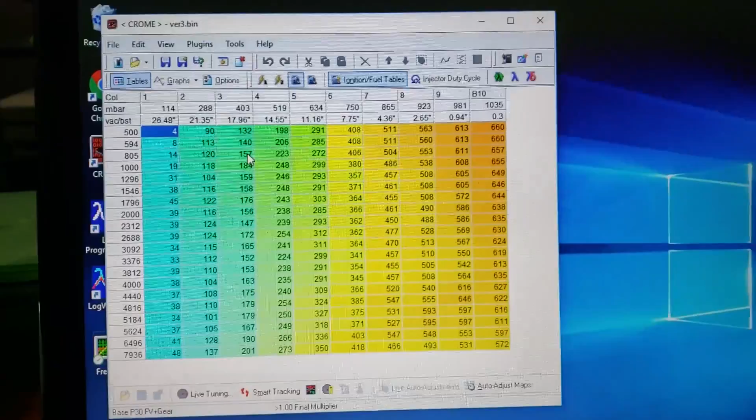What we want to do is add fuel tools, so we're going to go ahead and do that. Now we can click up here and go into multiplier calculator. What fuel tools does is put this advanced tab here.

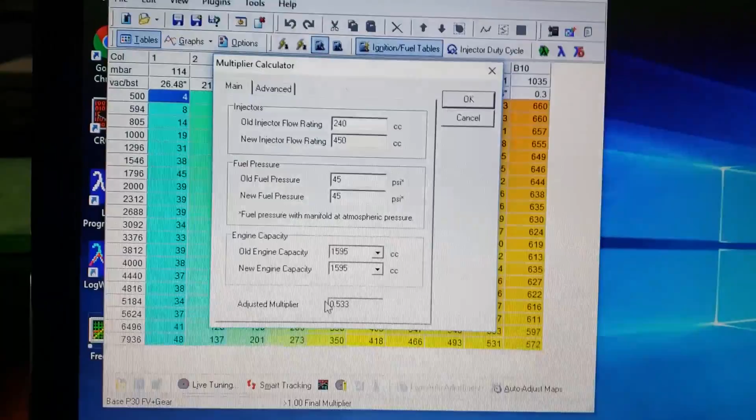So in the main tab, now what we want to do is put your new injector size right there. I'm going to put 450cc, since I'm running DSM blacktop injectors, and you can see it adjusts the multiplier down there. Now we're going to hit OK.

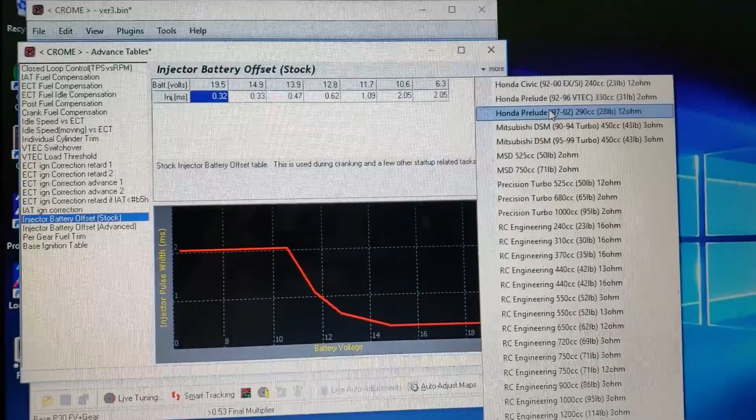The next thing we want to do is go into the advanced tables and down to the battery offset, and there's going to be some presets here. If your injectors are in here, you're going to want to pick them from this preset. So I'm going to go ahead and pick my DSM injectors right there. You can see the curve changes.

Now what we want to do to get the car to idle at the air-fuel ratio we want -- my tune was idling at 16 AFR, so that's what I want it to idle at -- I'm going to burn this and run it in the car and see where it's at.

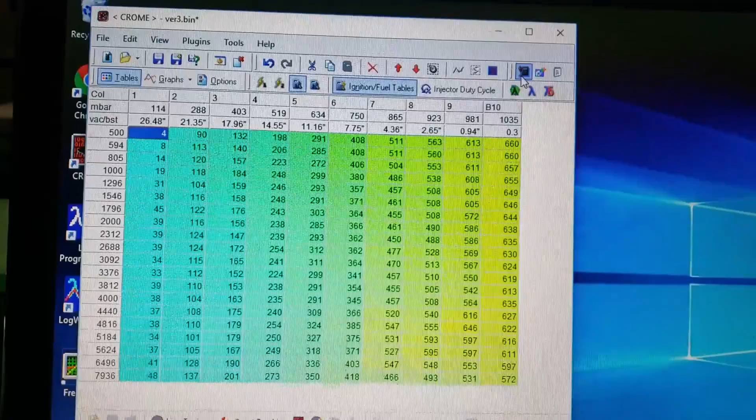Then we want to go into advance here and change this offset. By 10 at a time, if you add to it, it's going to add fuel. Technically, if it's running too rich, we might have to mess with this multiplier a little bit. But if it's running too lean, then we want to add to here. So we're going to get it to idle perfectly.

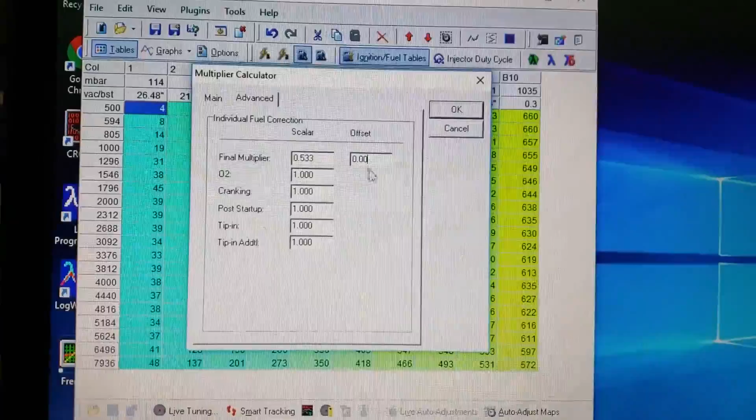And then you can mess with this other stuff. You're going to want to look it up in the intermediate Crome guide -- I'll put it in the description. It kind of explains what all of this stuff does. It will help your car.

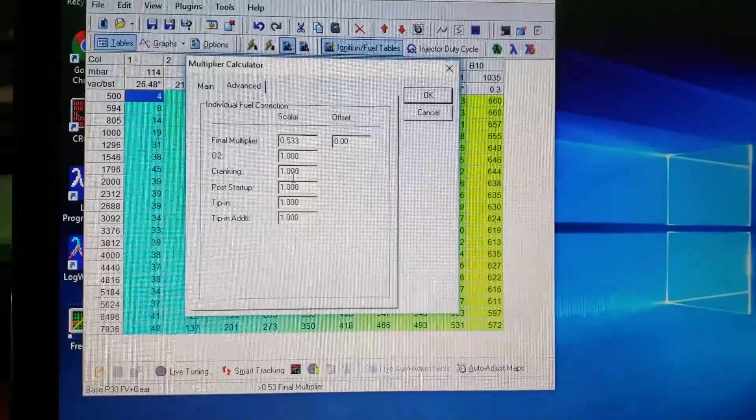If you make adjustments here, you can add fuel, like more fuel when you're cranking, more throttle after the car starts, things like that, to get it to run right, because it's probably not going to start perfect. But you should be able to get it to start and idle, even if it has a hard time, just by messing with these.

So that's what I'm going to do right now. I'm actually going to write this to the chip and go try to start the car and see what happens.

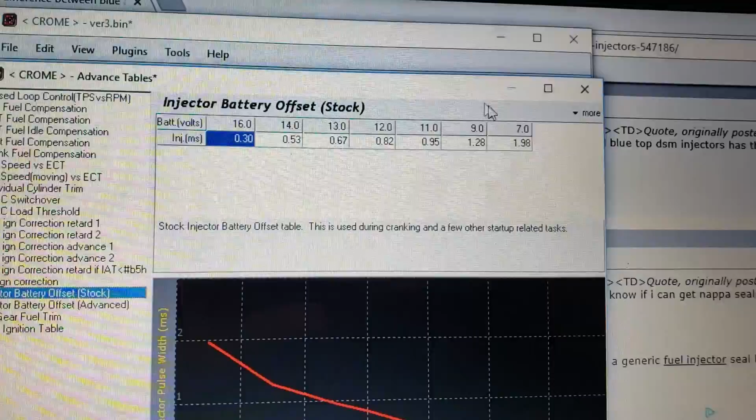So I did make a mistake here, I just want to point it out. I picked the wrong injectors -- I have 2G blue top injectors, so I'm going to switch to that one. And it did change a little bit, so it does matter.

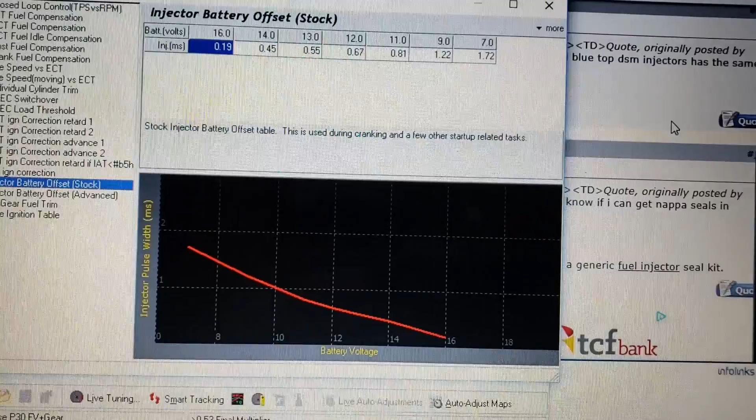Alright, here's the first attempt for starting the car with the new injectors. Nothing.

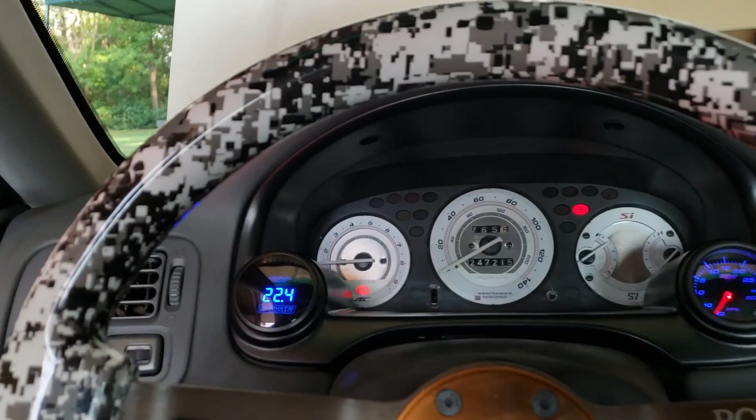Alright, I'm going to try to figure some stuff out. Alright, so one more crank and we got it to start. And it's not running on all the cylinders, so I think something went wrong with my injector install. I don't think it's the tune. So I'm going to figure that out, and then I will get back with you guys.

So, crazy story. It's idling right now, very lean, barely idling, but this is fine. I can adjust the fuel to get this to work. It's firing on all cylinders. Well, I mean, it's misfiring because it's so lean, but it's not misfiring evenly anymore.

It was cylinder number 3. The injector wasn't firing for some reason. Everything seemed to be plugged in and everything, I don't know what the deal was. I unbolted the fuel rail, and I'm going to shut this off because I'm going to have to turn up the offset a whole bunch.

I took out the fuel rail and swapped that injector with cylinder 2 to see if it was a wiring issue, to see if the issue would follow the injector or follow the wiring. When I started it back up, all of them were firing, so I'm thinking maybe it just wasn't plugged in all the way. Well, all of them are firing now, so we can go ahead and continue, but I got to go back to work, and then I will show you after work.

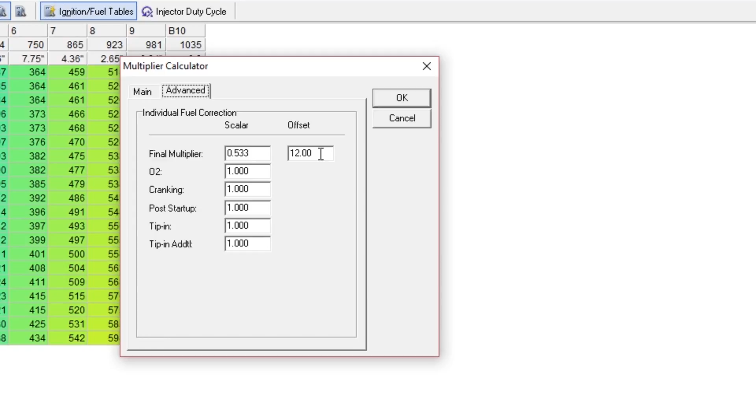Okay, so I want to apologize. It's been a little bit of time since I've actually done the injectors, so I don't remember everything I did to get everything working properly, but I can show you one of the things I did: I ended up with a 12 offset to get that 16 air-fuel ratio I was looking for.

Currently editing this, and I realized I never really mentioned this. I'm doing this on a D16Y7, meaning I don't have VTEC at all, so I disregard all VTEC maps for this entire video. If you're setting up your first tune, you want to set up the low cam maps anyway, so you'll have VTEC disabled and can follow this step by step. Then once you enable VTEC, you should still be able to go through this entire process and apply it.

Certain things will be a little bit different. I think Freelog might map VTEC on the high cam map. I'm not entirely sure, but you can figure it out for yourself. Unfortunately, I don't really have any experience with that because I've only worked with non-VTEC. Just wanted to throw that out there.

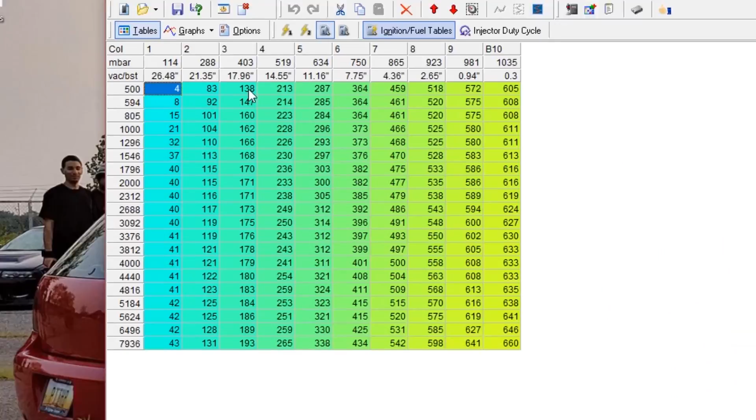Another thing that I did is I went through my map and rearranged it a little bit. I basically made it so, from this corner to this corner, you're constantly increasing, and from here to here, you're also constantly increasing. There's no values where you go from 376 to 392 to 378, you know what I mean, so there's nothing like that in there. You have a way smoother map, which I would recommend doing if you haven't done that already.

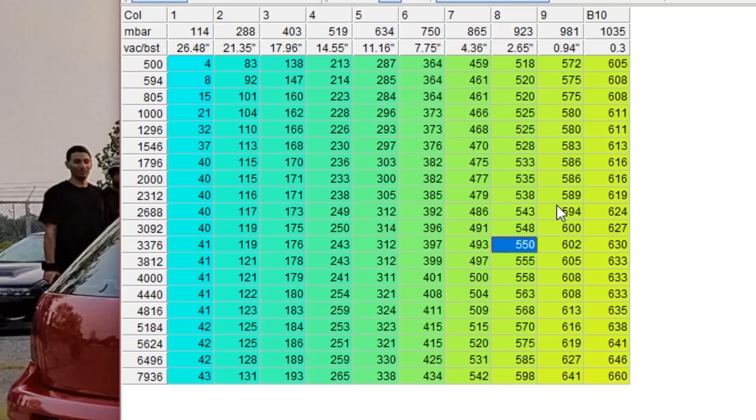And then from there, I'll show you how to go ahead and data log and tune. I'm doing this on my desktop computer, so I haven't been doing any tuning on this computer. I can show you from the start, except I already have my HuLog installed, but I'll show you how to do that. What you're going to want to do is download the drivers for your HuLog.

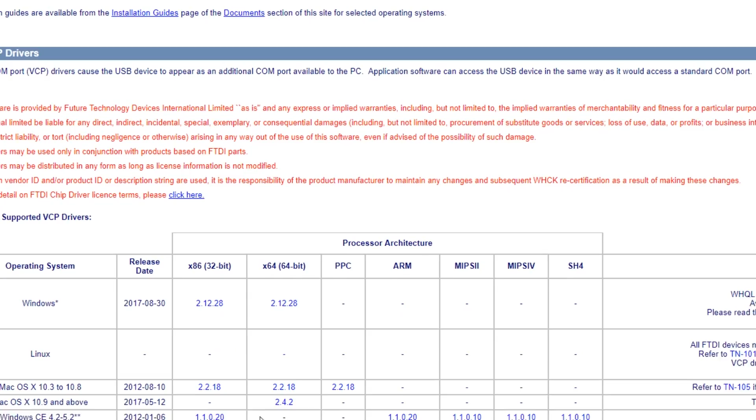So I'm going to download that. Now give me a second, I'm going to copy this to my desktop really quick. So now I have it on my desktop. What we're going to do is just extract this, and I can delete that now. We can take a look in here, and you can see this is what they give you for your drivers, which you might not know what to do with.

So what you actually end up having to do is go into the device manager. We're going to do that by right clicking on PC and going to properties and then device manager. You're going to see your uninstalled device in here, probably listed under COM. One thing you want to keep in mind is this number you see right here, COM6 - it might be different for you, so pay attention to that.

So to install it, you want to right click and go to update driver, browse your computer for the driver, and just browse to this folder and it'll install the driver for you. It's actually pretty simple. The next thing you want to do is right click on this and go to properties, then go into port settings and change the bits per second to 38400. If you don't change it to this and leave it at 9600, it's not going to read fast enough when you're data logging.

I made that mistake before, so make sure that's set up correctly and then you're ready to start data logging. One thing you want to make sure on your tune is that data logging is enabled.

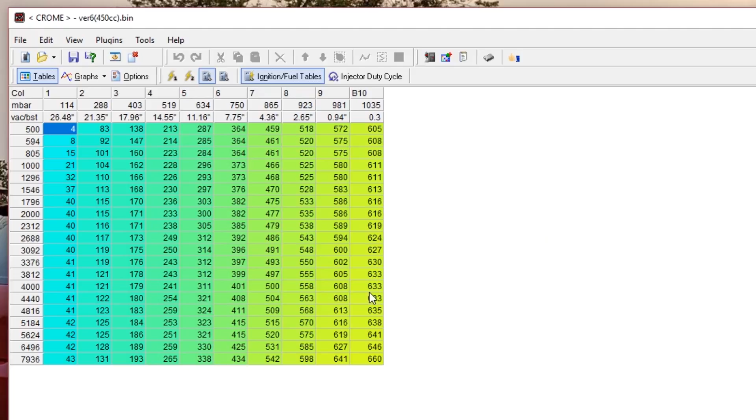On the actual tune itself in Crome, I'll show you that. You can open up your tune and go to plugins, then enhancements, and quick data logger if you haven't done that already. That will enable data logging on your tune. Write that to the chip. Now I'm going to show you how to open up or set up Freelog.

Just throwing this in here really quickly because I forgot. When you download Freelog, you can just search in Google for it. Make sure you're downloading this one right here from Freelog open source data logger, whatever this website is. If you download the top one from SourceForge, it actually doesn't work. Make sure you download this 1.0.93 from this website right here.

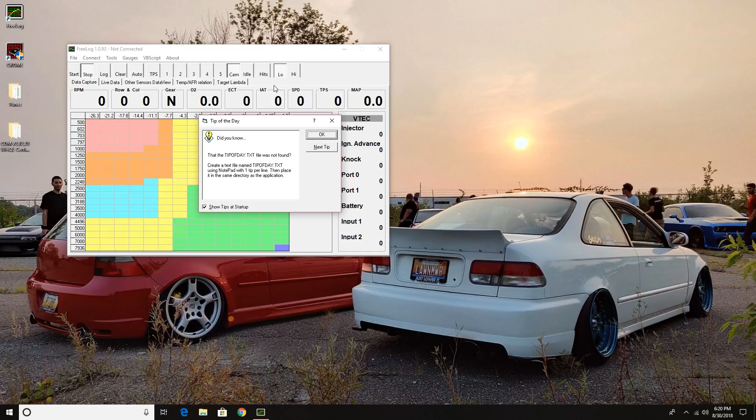Go ahead and open it up, and you want to go into the settings. Let's see here, tools, settings. You want to pick the correct COM port. Mine was COM6, and then I am going to look up the settings here really quick.

Okay, now I checked the settings with my other computer to see, and it turns out I actually didn't change any of this stuff. I don't know why it's highlighted all of a sudden, but I didn't change any of these settings. I left them all the same.

Make sure yours says Crome 1.4 up here so the data logging works properly. Here you don't have to do anything. And here, actually, this is really important.

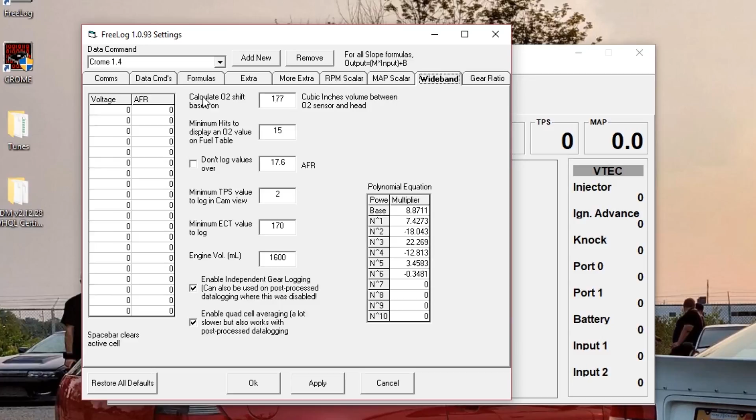So we're going to set a wideband table. One of the biggest complaints about Freelog is that it always reads the air fuel ratio off, and I did not find this online—I had to figure this out myself. You actually have to go in here in formulas and change O2 to use the wideband table. It doesn't do that automatically, so it's always going to read the wrong readings. I wasted a whole entire day trying to figure out data logging just because of this stupid setting. Make sure that that's set right there.

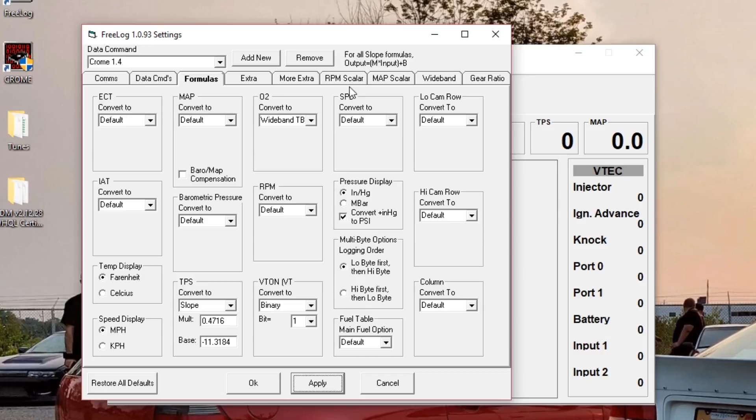Then you want to go into your RPM scaler. This actually has to match your tune that you're working with. So pull up your tune in Crome and make sure these match. Take a look at this over here: we got 500, and then this needs to be changed. You can just hit the space bar to clear each field. The last field and the first field are always going to be the same.

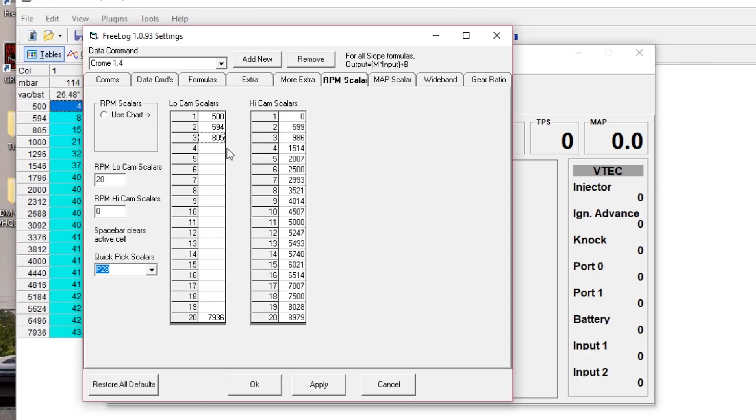So we have 594, 805, 1000, 5624, and 6496. Okay, and we're going to hit apply.

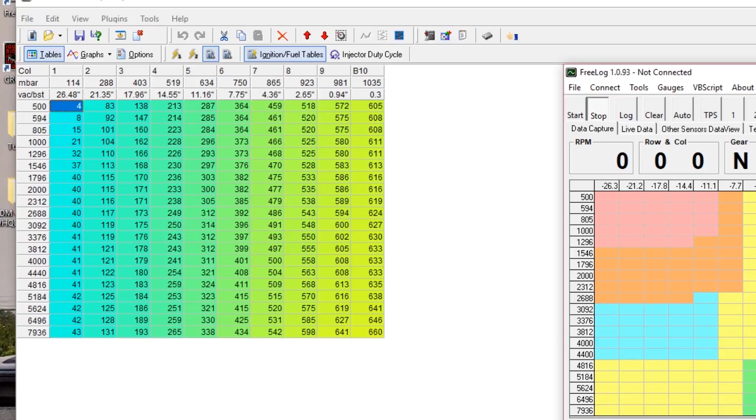The next thing we have to do is match our map scalars as well. I'm actually going to move this window out of the way a little bit here so we can see that a little better. You can see we only have 10 columns right here, so we're going to do the same thing—we're going to say 10 columns.

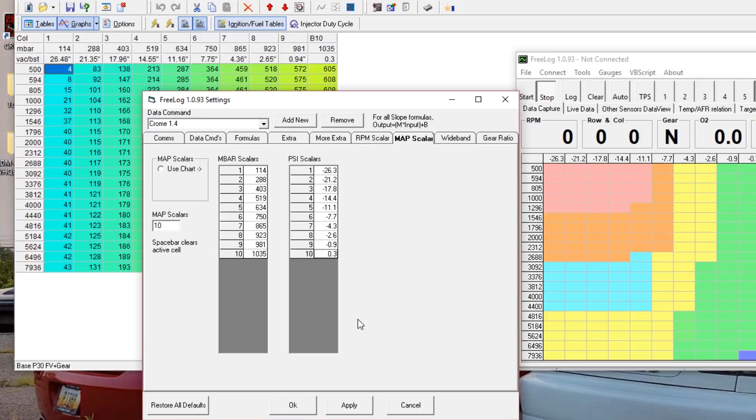This last column is actually a boost column. I don't know why this automatically says negative 0.3—it's actually positive 0.3, so switch that over. I think the rest of them should match up. Yep, they do. Okay, so I'll apply.

The last thing we want to do is the wideband. For the LC2 wideband that I have—here's another thing, a lot of people think you have to fill this whole table, you don't. So over here for your 0, mine reads 7.35, and then for 5 volts, mine reads 22.4. Okay, and we'll just hit apply.

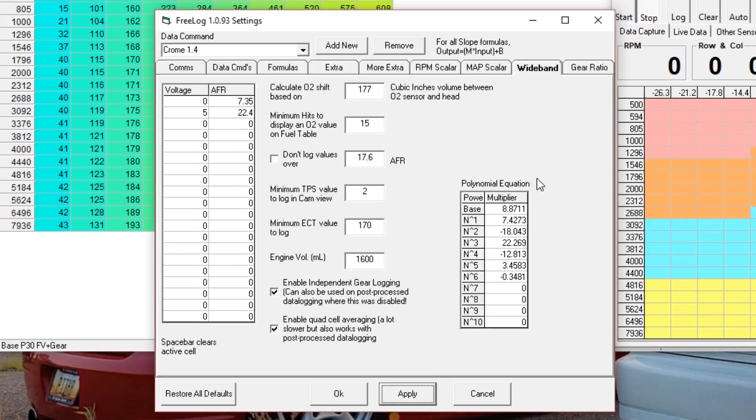Now, another thing to keep in mind is if you find that it's off in the middle, you can actually move this 5 volt down here and put like another middle value in here to make it a little bit better. Okay, so I'm in the middle of editing and I realized I kind of forgot something.

When you're data logging, you have to run your wideband through your ECU. It's pretty simple to set up—you just have to splice into your wideband wire, well, I have an LC2, but whatever one sends the reading to your gauge. Splice into that and run that to the O2 pin on the ECU. You just cut the O2 wire and put connectors on it so you can plug it back in when you're done tuning if you want to actually use an O2 sensor.

There's instructions online, I'm not really going to go through that. Just look it up online—look up how to wire your wideband to your ECU.

And then you'll be able to data log with that information. Now the ECU maxes out at 3.8 volts, which is like 18 point something AFRs. You don't need to read leaner than that. There's a mod to mod your ECU so that it reads up to 5 volts. It's pointless, don't even bother with that.

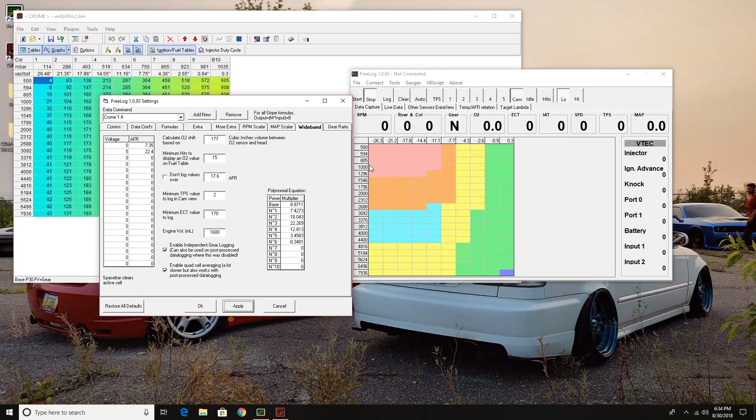Just run it exactly how I'm telling you to set it up right here. Just look up online how to wire the wideband into your ECU. Now, by default, this quad cell averaging is enabled. In this enable gear logging, I just turn that off.

Now, the quad cell averaging, this might work even better. I'm not entirely sure on whether you should use this or not. I actually don't use it, I have it disabled. But you might even get a better tune or have to do less work with this enabled. So you can play around with that if you want. I'm going to hit apply right here. This is just the way that I have it.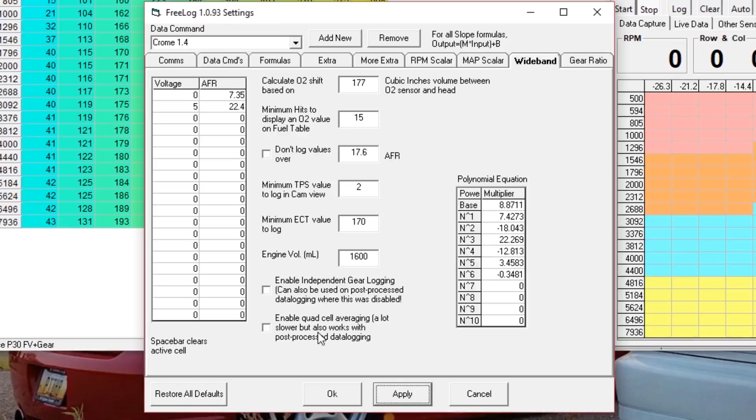Or you might have a Crome Gold ROM or something like that. You can't use this with a Crome Gold ROM. It has to be a P30 base, or P72 I think works as well. So we're going to hit stop.

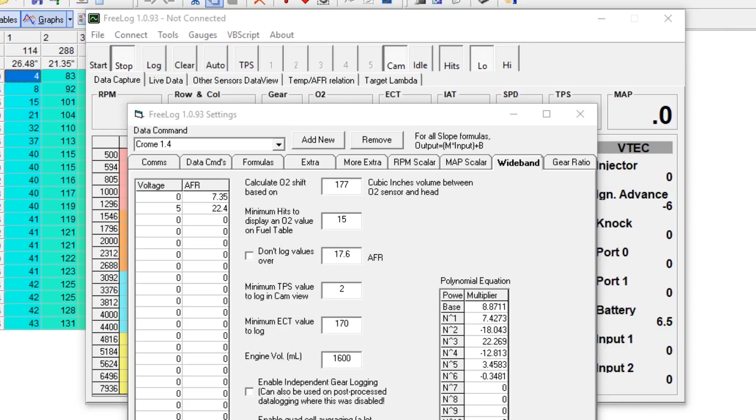You can switch between cam and idle. There's going to be 2 different maps, and by default this is set to record every 15 hits, I believe. You can change that somewhere. Right here, it averages those 15 and records with that. But I leave it at 15. It seems to work. If you go on a long drive, that shouldn't be an issue.

So after you save your data log file, you get something that looks like this. So here's the TPS capture first. You can ignore that, just scroll all the way down. We have the gear logging turned off, that's why all these are showing nothing.

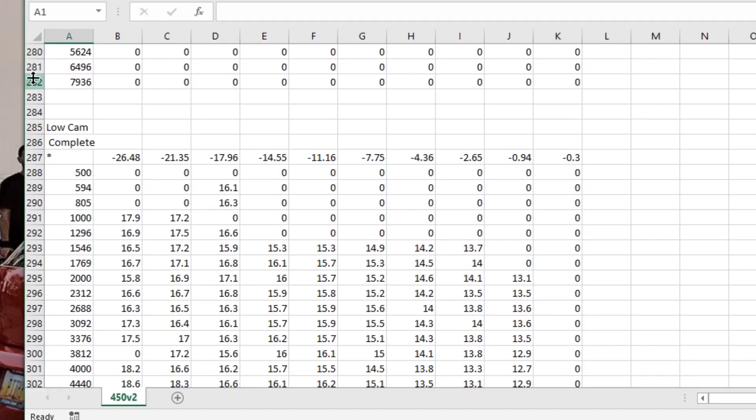And then you have your low cam. This is what you're looking for right here. This is your driving air fuel ratios, and then you have your idle right here. Generally what I do is I combine the two. I just replace this section down here with the idle section.

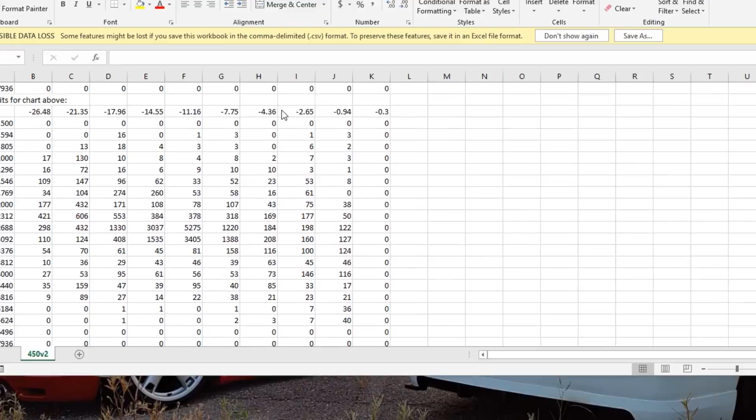So the next thing that you want to do is you want to have an Excel file that's basically going to do the tuning for you. I have that right here in this tuner file. I also have another one right here, which is an average calculator. So if you want to do 2 data logs, then calculate the average and then tune, you can do that. I'm probably going to create a GitHub or something like that and link these files in it for you guys.

First, I'm going to show you the average calculator. So one thing that I like to do sometimes is take the average of 2 data logs, which we can do right now. So I'm just going to open up this data log, and then I have another one right here. We can just open up both of them.

So if we take a look, the first one, we want to go down to our low cam, and we can copy this whole section. And then I have this average calculator right here. I'm going to go ahead and open that up. And we can paste it right here in sheet 1. I think I've already pasted this, but yeah, it's already pasted.

And then take the low cam from sheet 2 right here, or from the second data log, I mean, take the low cam from here and then paste it into sheet 2, which I have also already done. And then the way this works is basically if it's 0, if both of them are 0, it leaves it 0. If one is 0 and one is a number, it takes the number from that one. Or if they're both a number, it calculates the average.

So we can kind of see right here, sheet 1, there's nothing right here in these two, and then sheet 2, they have values here. So if you look at sheet 3, it has those two values from sheet 2. The rest of the values you can see are averaged. So this gives you kind of an average data log between the two of them. Then you can take this data log and paste it into your tuner Excel file, which I'm going to show you next. So I'm actually going to close out of this.

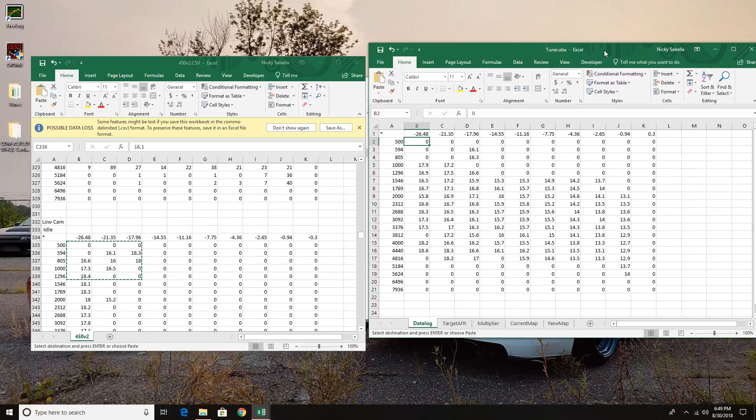We'll shrink this down, and same thing with this one, shrink it down a little bit and move it over to the side. Then we can grab these 2 right here, or these 4, copy them, and paste them right here.

And then we can grab these 4 right here, or these 3, copy, and paste these. And then this last one right here, this 16.5, copy that, and that goes right here.

Generally I find that you want to use the idle values in this area, not the drive values in this area, because you're never really driving down here, you're always idling down here. So that's where I get those values from, and then we can use this to tune.

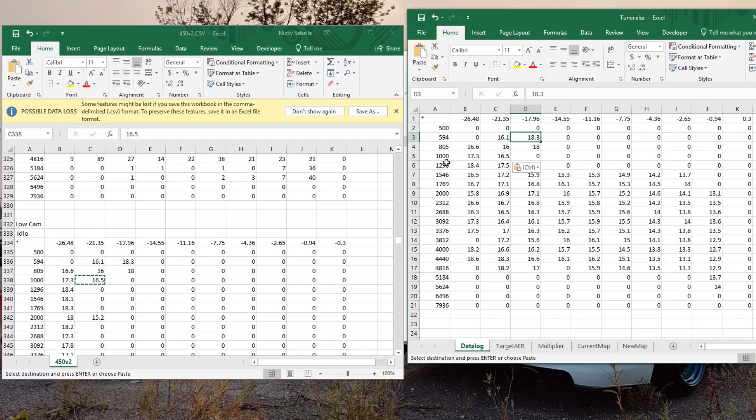So now at this point we can close out of our data log. The way this works is you have your data log right here in the first sheet, and the second sheet is your target air fuel ratios. Now I'm going to explain this to you.

This is a really good target for naturally aspirated motors, at least this is what I like to do. So in cruising areas and idling, I like to be at 16, and then I like to work my way up as you get more into the throttle.

I also like to add more fuel as you get to the very, very high RPMs, just to be safe. I mean, you're never really going to be in this area over here, but I like to do this just to be safe. So you can see I gradually go down.

I go from 16 to 14.7 to 13.1. Now this last column right here, we never hit this, so I always just leave that 13.1, and the one above it, 13.1.

Now if you look here, you can see as you get into the throttle, you get a little bit more cruising air fuel ratios. And then right around here, I like to start gradually going down towards this 13.1. Generally my car doesn't really hit this last column, this is like a boost column. Even if you were negative 0.3, my car doesn't really hit it for some reason.

I've tried that too, so I kind of just ignore this a little bit. It seems to hit this column down here, right towards the end, maybe for a couple of them, but other than that, not really. It kind of stays in this column, which I like to leave around 13.4, except for right at redline. So these are just the target air fuel ratios.

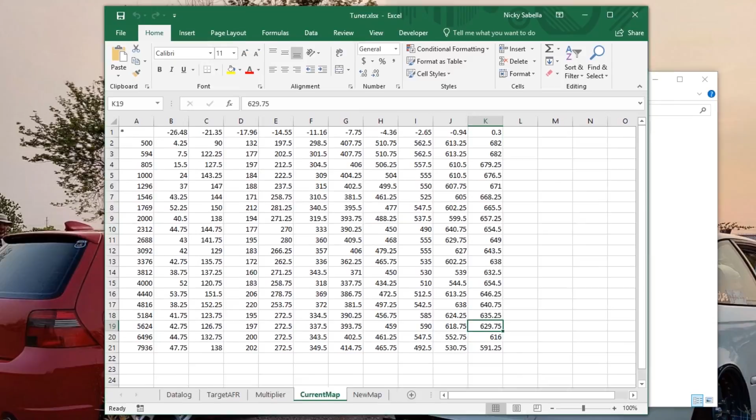Once you determine your multipliers, you want to take your current map. This isn't my current map, I'm going to grab it from Crome. So you take your current map like this, copy the whole thing, go back into the Excel file, and paste your current fuel map in right here. This last thing takes your current fuel map and multiplies it by the multiplier, giving you a brand new fuel map.

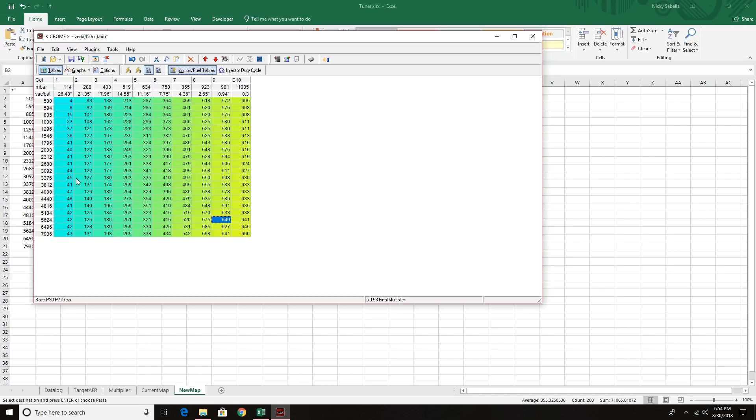So all you have to do is copy this and paste it into Crome. We should be able to select the whole thing, yep, and paste, and then you have your new fuel map. Now when you're doing this, basically I write this, do another data log, write that, do another data log and write that. It gets a little messy.

You start to see stuff like this. It goes from 338 to 341 to 335. Obviously that's not very good. You don't want it to go up and then down. So eventually you're going to get something pretty extreme from this.

What I like to do is take your highest value from here, which is about 355, 354, and paste it down here at the bottom. We're going to put 355, 356, similar, it doesn't really matter, and then go all the way up to somewhere up here where it's still gradually increasing. So maybe this 296 right here, and press P to interpolate.

That's going to give you a gradually increasing number right in the same fuel range you need to be. Then when you're all done, what I normally do, once you've done this to the whole thing, is take this bottom row and copy it, paste it down here. You're never going to hit this number, but you're going to hit in between these two.

So I usually increase this by like 3%. If we hit A, we can adjust this, increase it by 3%, and you have that there. Same thing goes for this, because you never really hit this, or at least I don't. I take this last field and add 3 to 5% right here. Then you have your map, so you'll have an even number here, and it'll be increasing this way, increasing this way.

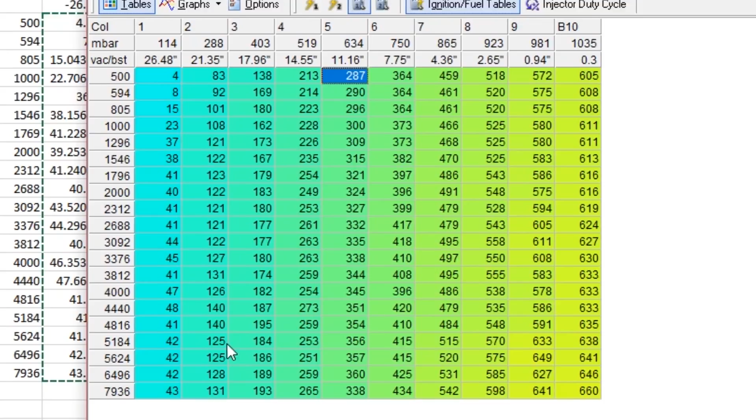That's really how I go about tuning my car. Like I said, I'll link some of this stuff in the description so you can use it yourself. If you have any questions, just let me know.